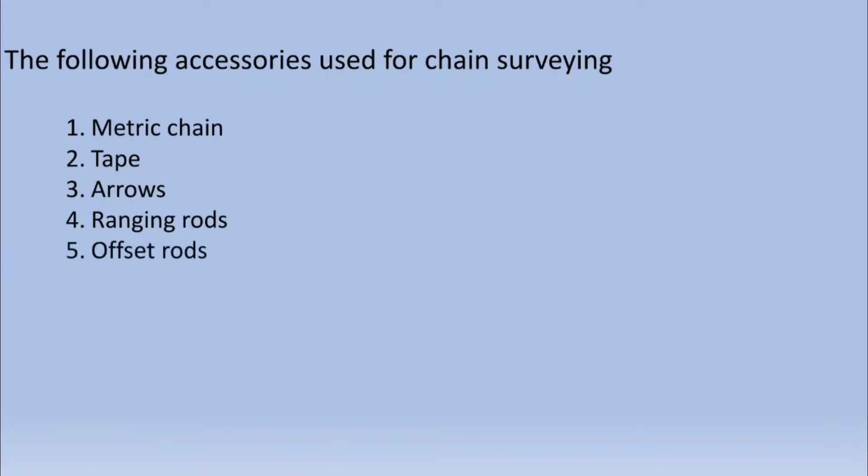Hi friends, today my topic is chain surveying. The following instruments are used for chain surveying: the metric chain, tape, arrows, ranging rods, offset rods, cross staff, wooden pegs, and plumb bob.

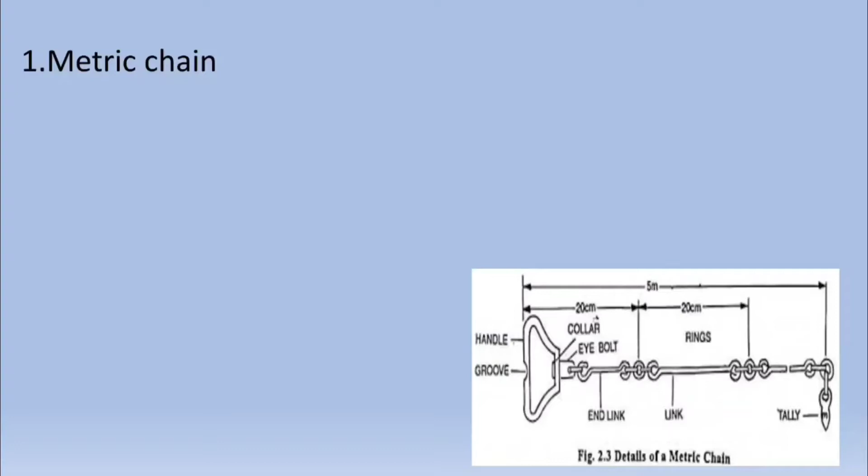Chain. Metric chain. This is the drawing of the metric chain. It is made up of galvanized wire. Chains are used for measuring horizontal distance. Metric chains are generally available in 20 and 30 meters. A 20-meter chain has 100 links and a 30-meter chain has 150 links.

Each link is equal to 20 centimeters. Brass tags are fixed at every 5 meters. At every 1 meter, brass rings are tied for easy identification of distance.

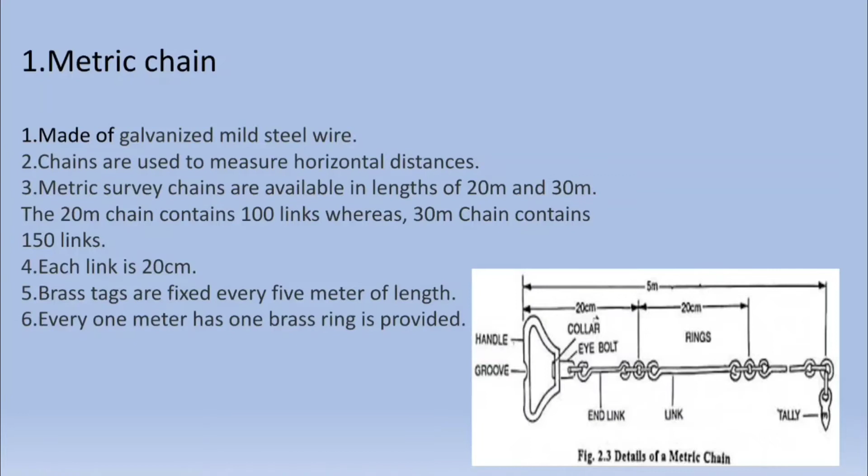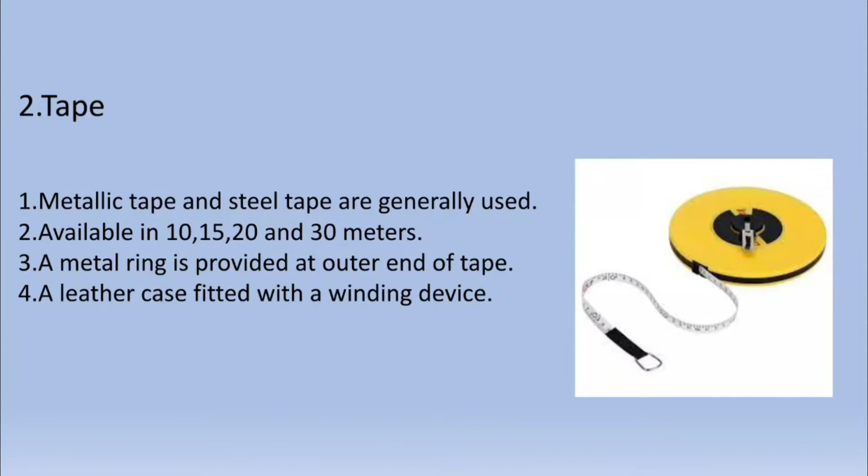Tapes. This is the diagram of the tape. Metallic tape and steel tape are generally used. It is available in 10, 15, 20 and 30 meters in length. A metallic ring is provided at the outer end of the tape. A leather case is fitted with a winding device. It is used for measuring short distances.

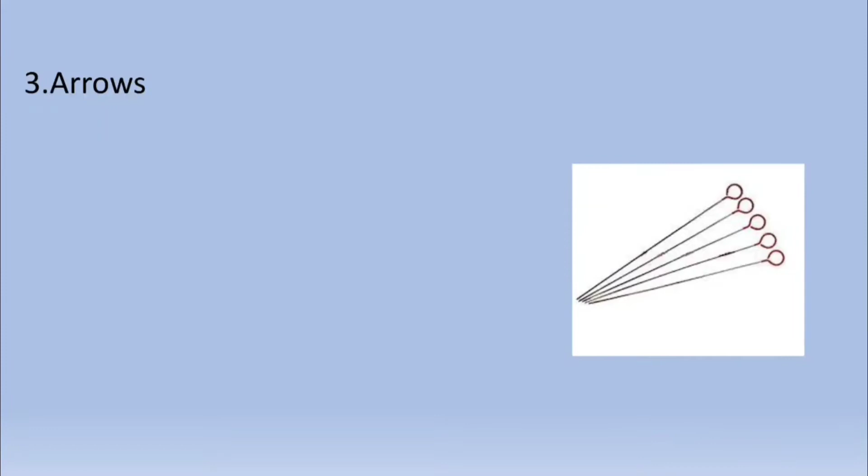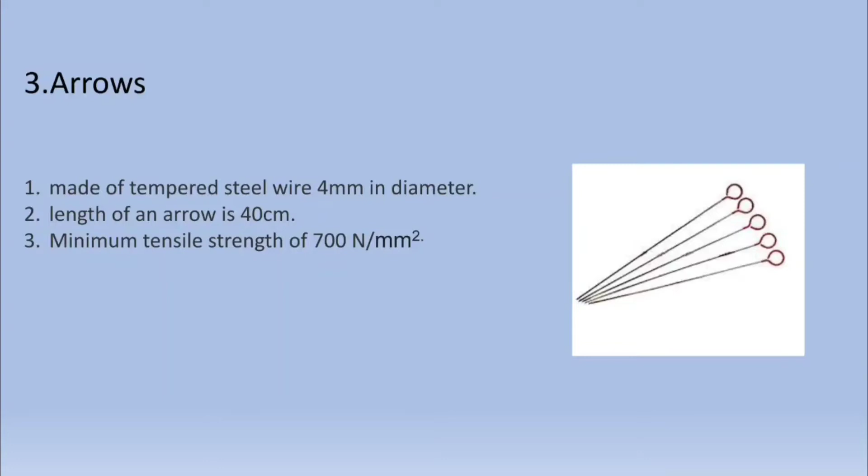Arrows. This is the picture of arrows, made of tempered steel wire 4 mm in diameter, with length equal to 400 mm, that is 40 centimeters. Minimum tensile strength is 700 newtons per mm square. An arrow is inserted in the ground after every chain length is completed. It has a sharp end and is bent into a circle, easy to pull out from the ground.

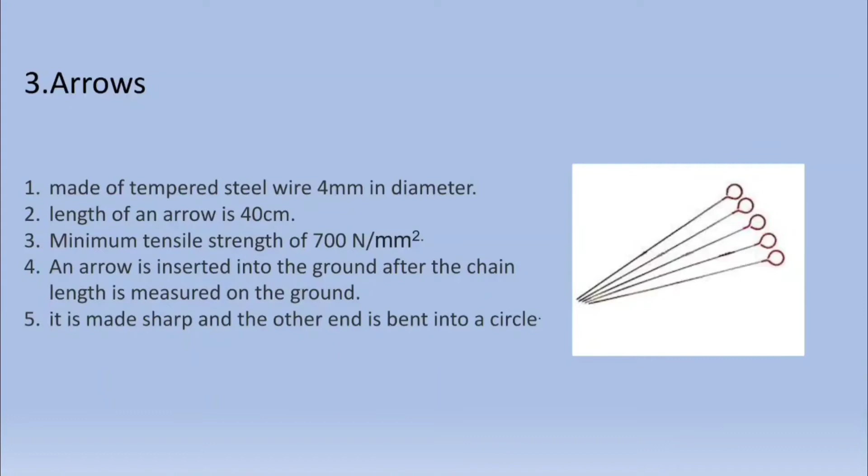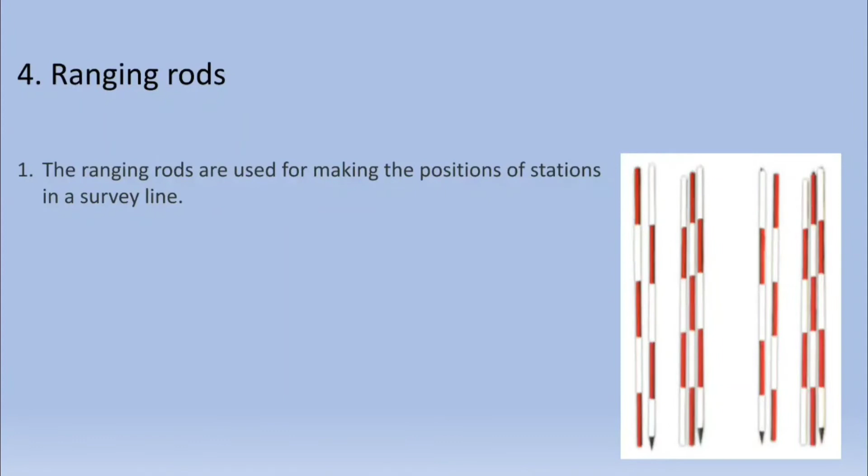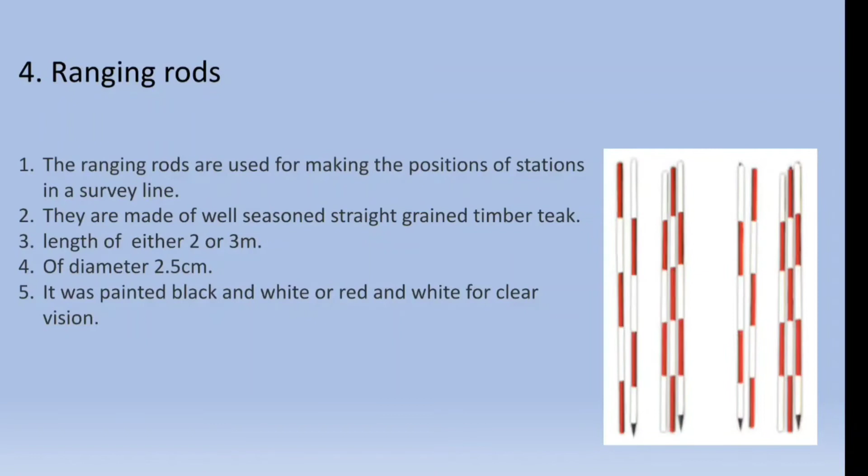They are made of well-seasoned timber, 2 to 3 meters in height, with a diameter of 2.5 centimeters, and painted white and red or black and white to be easily visible at long distance.

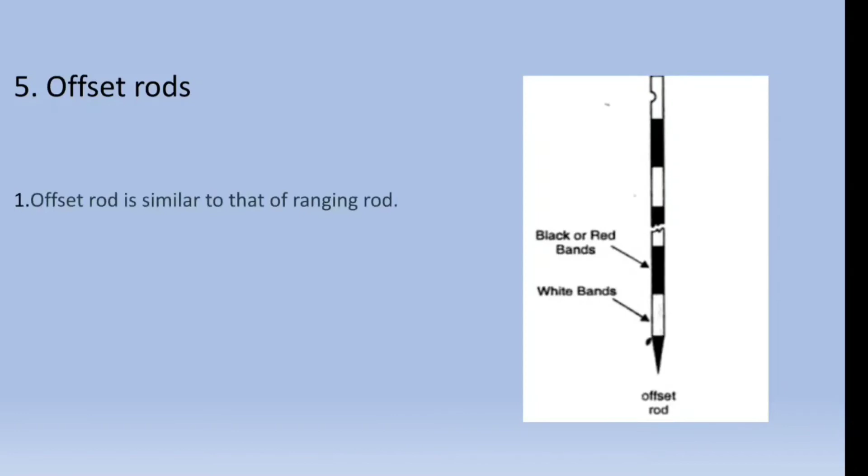Offset rods. This is the picture of the offset rod. The offset rod is similar to the ranging rod. It is pointed with an iron shoe at the bottom, easy to fix in the ground. A hook is provided at the top of the offset rod to enable pulling the chain. It is used for locating offsets near the survey line or chain line.

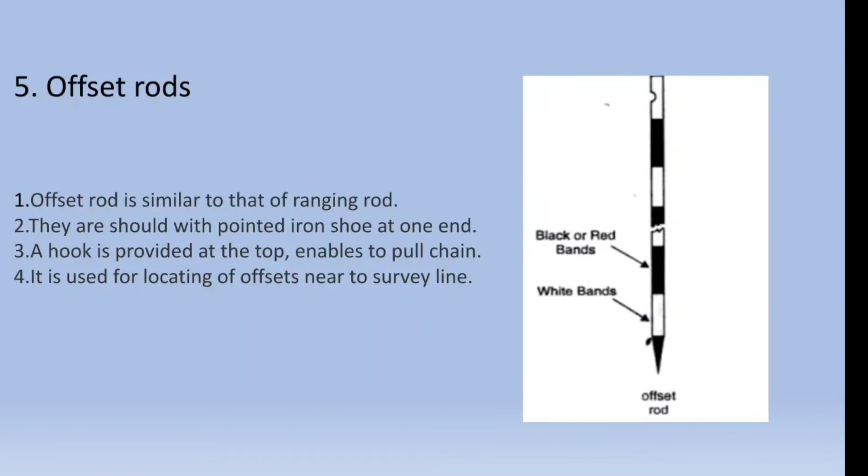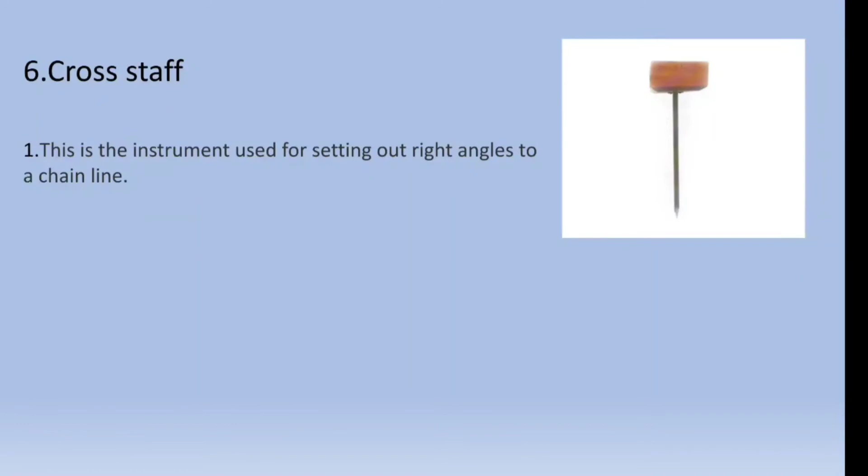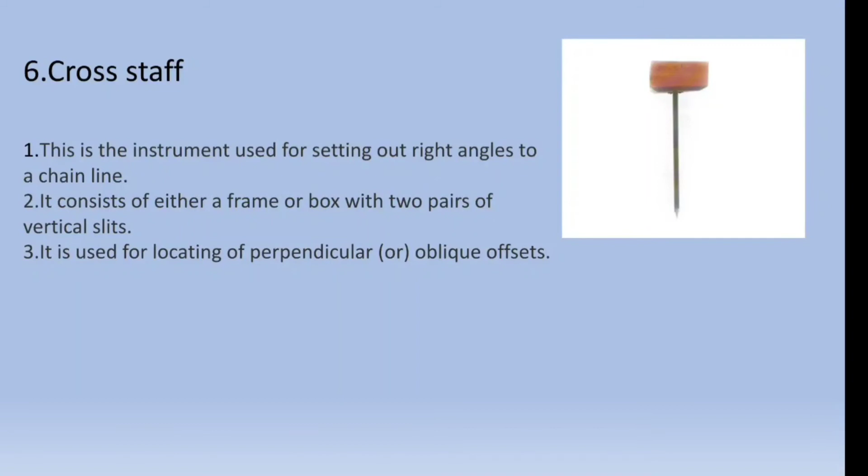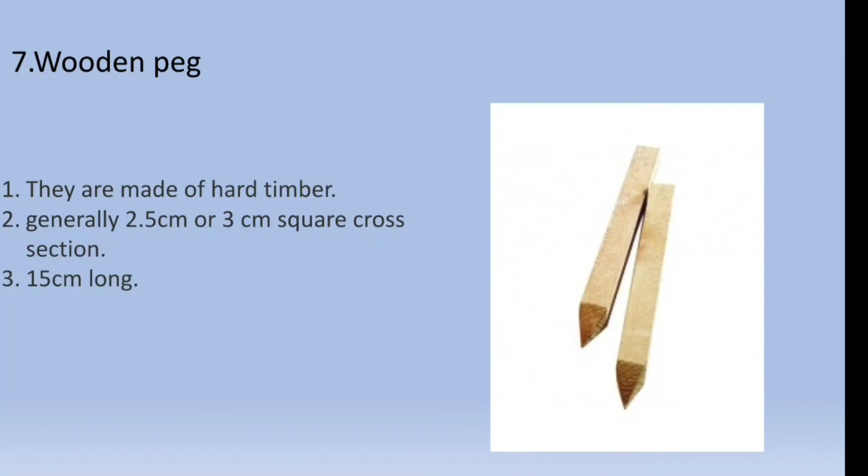Wooden pegs. This is the picture of the wooden peg. They are made of hard timber. Generally, the cross section is 2.5 to 3 centimeters square, and the length is 15 centimeters.

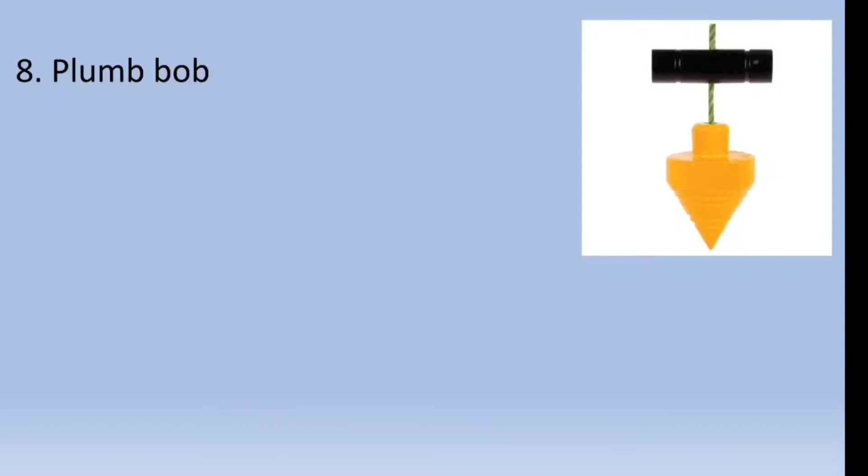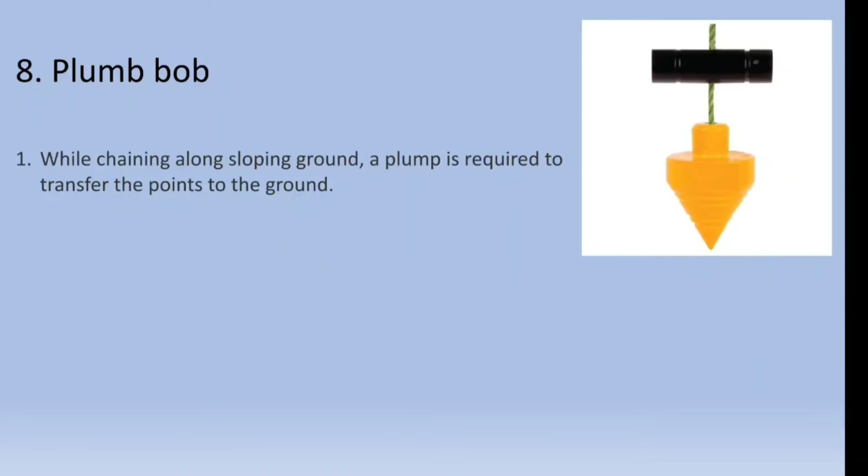Plumb bob. This is the picture of the plumb bob. While measuring on sloped ground using the chain, to transfer ground points into the air, the plumb bob is very useful. This is the picture of measuring sloping ground with the chain. P2 is the ground point; we transfer that point into the air as P1 using the plumb bob.